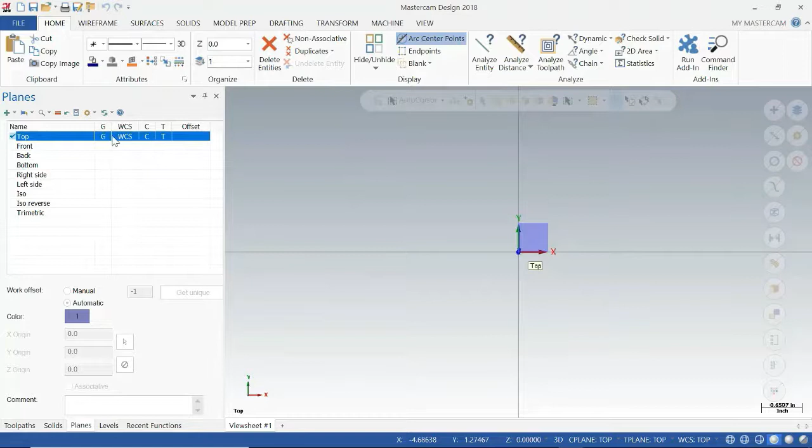And I'll go through some of these. On the left here, this will kind of record everything that you've done basically in here, so this is like your property manager to some extent. Right now we're looking at all the toolpaths that we make. We can also look at the solids we bring in, and we can look at the planes. So here we can see that we have all of our top is for our work coordinate system, our construction, and our tool.

The levels, sometimes if you get a more complicated part with a lot of different entities, like lines as well as solids, then you can make different levels. Sometimes you might have your wireframe on one level and your solid on another, and you can toggle between them without accidentally messing with both.

Then there's the recent functions, over here, I'll talk more about that later. You have these selection options up here, which will allow you to change the way you can select things.

Over here, this will help you select a lot of things at once. So for example, select only solid entities, select all solid entities, and you'll see there's surfaces and wireframe too. So you can see all the different types of entities, and if you need to select certain ones, you can do that here.

Going across the top, we have our home tab, which allows us to change the colors of different things, so you can select them and then change their color. You can look at your different levels. One thing I'll use a bit is analyze distances or analyze an entity, just to see where it's at in space or how big it is.

Next we'll go to the wireframe. The wireframe allows you to put in some simple geometry. Anything more complex than some points in space, rectangles, or a circle, I'd pretty much do in a CAD program, since I don't really like doing that stuff in CAM—it's just not quite as intuitive.

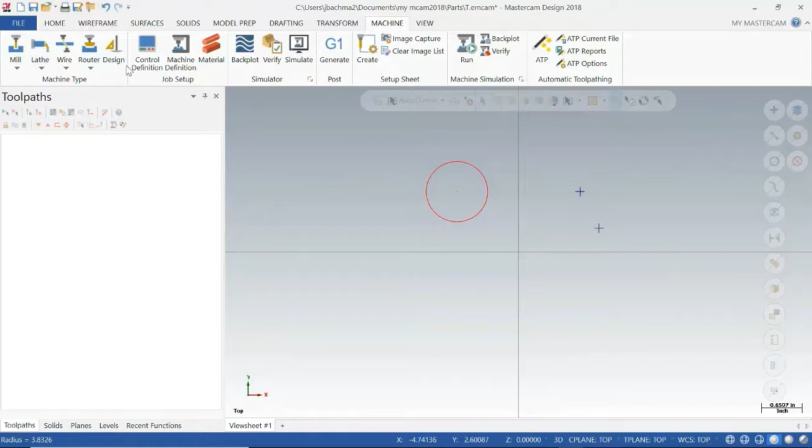And then you can change the way things look. So I already have my axes on—I like to do those. You can also hit F9, if you hover over it you'll see it'll say F9. You can also get rid of certain things, like make solids go away, that sort of thing, if you don't want to see them.

So that's kind of an intro into this interface here. So there's a—first let me delete this, sorry. I'm going to select those and delete those.

Okay, so now let's start talking about the work process for working in Mastercam. First thing we're going to want to do is bring in our solid, the shape that we want to eventually turn our workpiece into to make our part. And then we're going to have to tell it what stock we're going to start with.

You should keep this in mind: you need to think about how you're going to machine or manufacture something the entire time you're designing it. This shouldn't be the first time you're thinking about how you're going to manufacture it, otherwise it's going to be impossible or not very efficient to do. So hopefully you've thought about it before this step, including how you're going to hold down the stock while you're processing it. There's a lot of tricks and things you want to think about before you get to this point, but hopefully after watching this you'll have a better feel for what some of those things are.

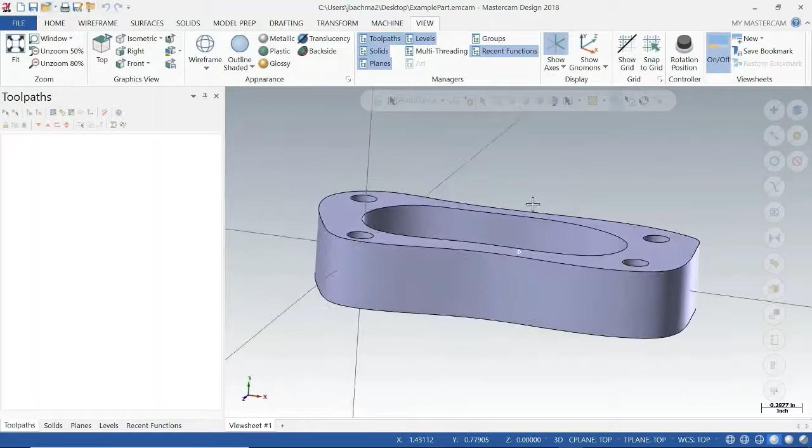You can see it's not really where I want it in space—maybe that's not obvious yet—but it's going to be hard to set my zero point kind of here. You can also see that it's not oriented the way I want. This will be the top portion in SolidWorks; it'll actually usually pull out the front in the Z direction. So if you want your part to come out oriented right to begin with, have the side you want to machine from facing the Z direction.

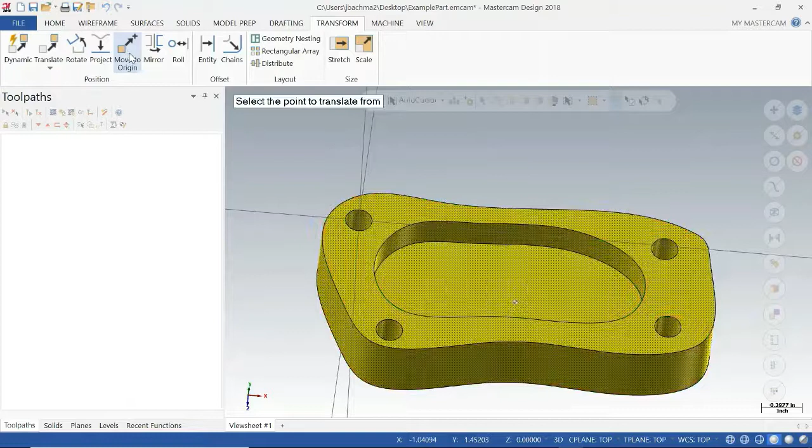You want to be careful a little bit when you say move to origin, because sometimes if you sit for too long, you can accidentally select some of these outer edges and not the actual center point.

Okay, so now I could rotate this down in the Z direction. I actually just usually use the translate to plane. So it says select the entities, so I want this solid, hit end selection up top. I don't want to copy it, I want to move it, right? And I'm going to take this top plane and make that my front plane, so that way it's going to be facing up. Let's give it a little preview. That looks good, right? Still got top, top, top. That looks good.

So now basically I need to translate it in space. There's kind of some different thoughts on this area. If I'm going to have my stock here in positive X and positive Y, I'm probably going to touch off my origin here on the front left. That's nice because the edge finder, or if you're going to use the side of a center drill, it's kind of out front, easy to get to.

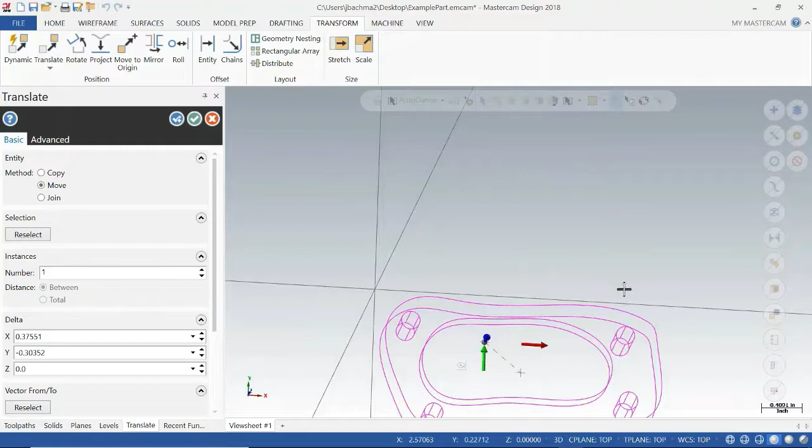You might also want to just go in negative Y and positive X. Let me move it around, maybe that'll make it a little more obvious. So if I move this, we could move our part here, and then we'd have our stock around it, and we could then touch off to the top left. The nice part about that is that you're against the fixed jaw of the vise, so that's not going to move unless you take it off the table. A lot of people on our campus will do this front left though, so it's probably just easier for people to check your work if you do that.

I can see my Z height is already correct. If it's not, you'll want to move it down so it's right even with the top. So I'm going to make it not even with the top like this. And it's not really, so you might not even know how far off it is.

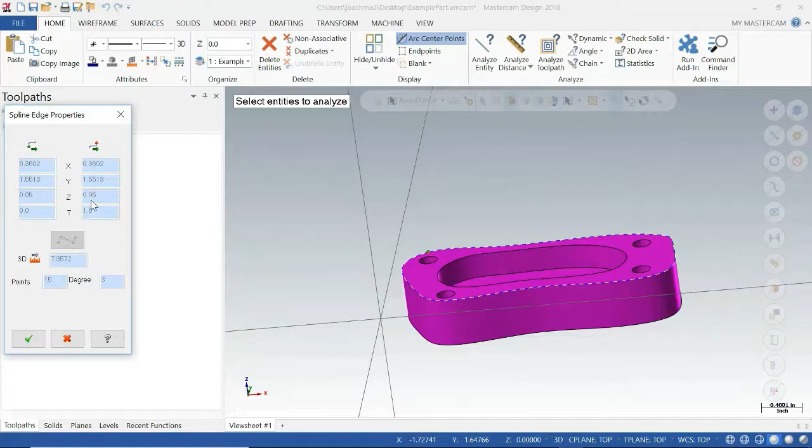So what I might do is go to home and do analyze. I can select a face, or I'll just select this edge. I'm going to see, okay, where is this at? And it tells me this Z is at 0.05 at this point. So okay, I know it's at 0.05, so I've got to move it down.

So I'm going to come down to the transform. I'm going to click on this whole solid. And I'm going to go negative 0.05. And then I'm going to click check, right?

So one thing you might do is look at it from the front. You might right click and then hit front. Then notice that your construction plane and tool plane got messed up. That's actually going to mess up when you try and generate toolpaths. So you'll notice that now, because my construction plane is the front, I'm making circles in that plane rather than the top plane. That's kind of the purpose of that plane.

But again, we're going to want to right click everything on top, right? So the scroll wheel in and out, if I hold shift and grab the scroll wheel, I can move it around. Also left, right, up, down on the keyboard will move it around in space for you. I usually kind of keep it somewhat isometric.

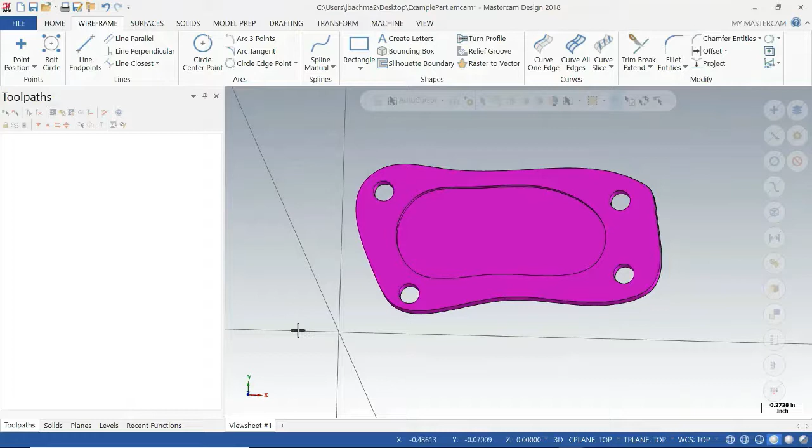Okay, so we have our part in a reasonable spot. And I might think, am I going to put a block of material in here and then cut this out in the vise? I mean, probably, it's probably one way I could do it. I could also use some step blocks and fingers and hold down the piece right on the table with a little piece of material between it, so that I'm not cutting into the table of the mill. So those would both be possible routes to do it.

Keep in mind, you wouldn't want this to get real thin over here after you machine it, especially on the side that's on the vise, because then it's actually going to squish your end mill as it's going around. So let's consider the case where I potentially have some fingers down on the side, but that means I don't want to hit those fingers, so I have to think about giving myself some extra space on my stock so I don't hit it. That also means that piece of material might have to be squared off in the machine. Or you could get a much larger piece and put this anywhere without caring about its orientation too. That's another way to do it.

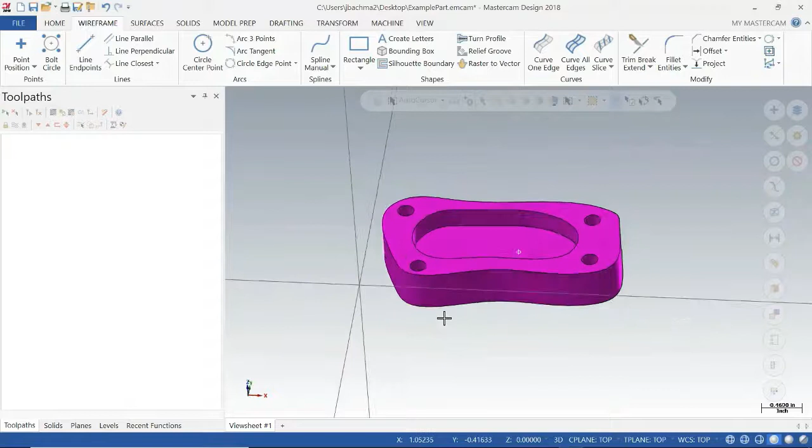So next we're going to decide what type of machine we'll make this out of. We're going to use a mill, and we'll usually use the default. You can bring in your own type of machine definition, but typically I won't. The only thing you might use is the millimeter setting—if you're going to work in millimeters, you can bring that in and do everything in that system. But instead, I'm just going to use the default.

Give it a second, and you'll see it pop up over here on the left. Let me just make sure everything's recording while I'm still doing this. Okay, we're looking good.

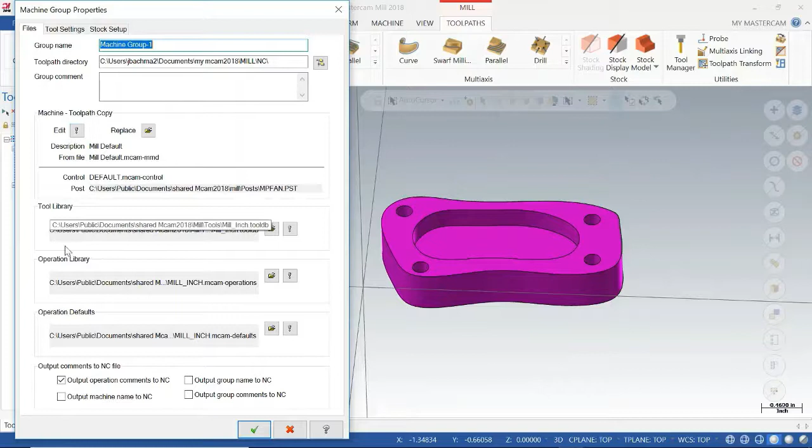Okay, so the first thing I'm going to open up is the properties. I'll start with the files. Oddly enough, the options button is this exclamation point—if you see it, that brings up more options in these different areas. For some reason it looks more like an error message to me; I don't know why, but this might even change in future versions. Here you can have your different libraries and defaults, but I usually don't mess with this.

Here's the first thing I'm going to start to modify: my tool settings. First, I don't want to pull in the spindle speed and feed calculation based just on the tool. It should be based on the material, and then it will use the RPM and the feed per tooth to calculate your feed.

Another thing I'll do is assign tool numbers sequentially, because if you have a big shop with 240 tools, tool number 240 will always be 240. If you have some huge machine, maybe it'd be more like number 15. But for us, we typically have to load in our own tools for each thing we're going to machine, so we're going to assign our own tool numbers and put them in the machine that way.

We're going to start our G-code with N100, and we'll step up by 10. That'll help us search through it if we ever need to find stuff.

Then you can select your material here. So let's pretend we're working out of aluminum—you can edit this and select different materials.

The last step here will be the stock setup. I'm just going to start with a rectangular piece. You can bring in your own solid if you want, and you could even add some of your fixturing to it, but I'm just going to use a rectangle. So what I'll usually do is click this top left point, which basically says that this point in space right now is at 0, 0, 0. Right now I don't have any entities—those would be lines or circles that I drew—but I do have solids.

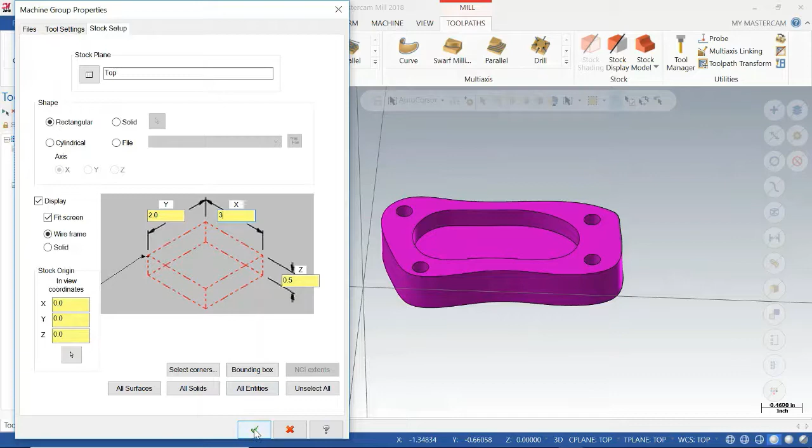You can see now, because I put 0,0 at this top left, I have kind of a bounding box for this. Let's keep in mind though, we wanted some extra meat so we can go around the outside.

So let's go back into the stock setup. I'll click there again. Maybe we want actually 4 by 5, so we'll add a few inches onto each one. I'll click check, and you'll see it's gotten a little bit bigger. That's probably a little excessive, and we can still transform it. So maybe I'll translate this a little bit more. I'm going to select it to move it, and I'll just use my arrows.

So maybe this is the size of stock I'm going to start with. I'm going to clamp it here and here, here and here, and give myself some room to cut this piece out. Maybe you just want the pocket on the inside, and you'd have to position it, but let's say you had a square piece with a pocket - then you'd want to position this to an exact point. For a shape like this, because I want to show you how to cut the outside out, we'll just put it here in space.

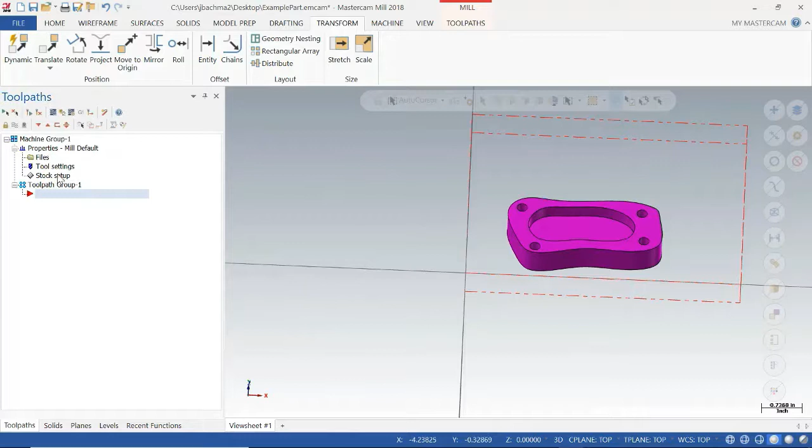So okay, we have our stock set up. I like the top of my stock and the top of my part all to be at 0 in Z, so I can tell when crossing from positive to negative in Z, I'm going to start to cut, and that's when I'm really keeping a close eye on things.

All right, so at this point, once we selected the mill, we have these additional tool paths that come up, and they're split into 2D, 3D, and multi-axis. I'll typically work with 2D and 3D. I'm sure more advanced machinists will use this all the time too, but I don't machine as often as I would like to, so I'm generally in these two areas.

You can see the different types. So contour - you'll select a contour and you can go on the inside or outside. You can also add extra paths, so if you want to create something that's kind of like a boss, you can do that. You can program in drilling in different spots. But let's start with the pocket on ours, right?

So we're going to start with the pocket. This is one area where it looks a little bit different in 2020 - they've just updated these symbols, but they're the same group of symbols. Because we have a solid and don't have any kind of wireframe entities, it won't even be an option here. So we'll click the solids and we'll be able to select things in 3D.

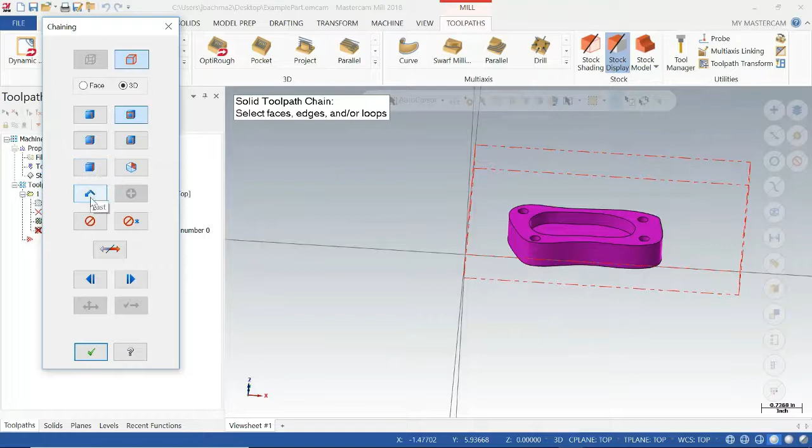So you can select just one edge here, and it'll do a full loop. Here you'll have to tell it which way to go along these different edges. Here it lets you just do a partial loop. You can select faces, the last thing, and this will unselect things or select things.

So when I'm coming and selecting, I'm going to select this pocket. Where I click is usually where it's going to start the cutting, so I'm going to select a part that's not super sharp, or maybe it can't get in. Here I think I'll be able to get a tool to get in, and I can select the top or the bottom as well - the bottom is nice because then it knows what depth I want to go. So usually I'll select down in here. It'll ask me, yep, that's the right face.

And I want my tool - so here my tool is going to be turning clockwise, so it's going to be conventional milling. I want to switch the directions, and I'm going to want to do climb milling, so it'll go along the left-hand side. I'll click check, so now it knows my contour. If I ever come back in here and want to reselect your geometry, you can click on select chain - you can remove and then reselect.

So next we're going to select our tool. I'm going to come in here to select tool library. You'll see various options, so let's come in - usually what I would do is select none to start.

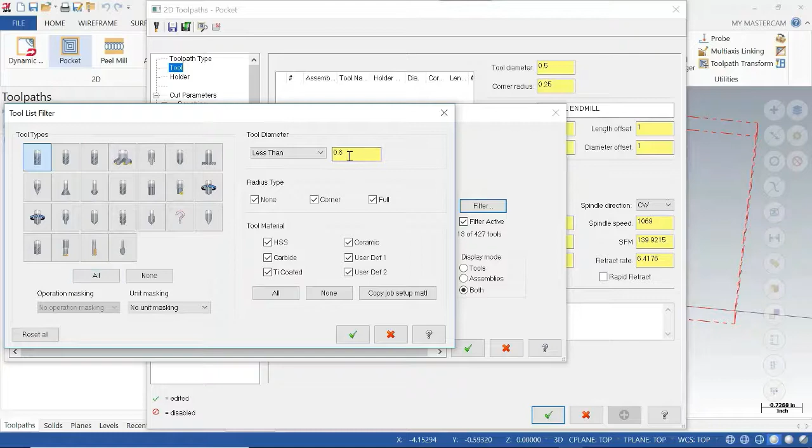I'll do my kind of flat end mill, and then usually I'll use a filter just to get rid of a lot of the sizes. And you can see I have these options. So let's try a 1/2 inch.

So this is tool number 290 in their system. You'll see when I bring it in, it'll come in as tool number 1 for me. And when I call out for a tool offset or diameter offset, this will all be tool 1.

So the material brings in 400 surface feet per minute. That calculates the spindle speed. You can use that to calculate these. So usually I'll just use rapid retract.

In this case, this is a little bit high, so I'll bump this down to on the order of 10. And my plunge rate's a little bit high. I'll usually do this on the order of 1 to 2.

And then you have your force tool change. This is nice in that if you do 2 operations with the same tool, when you do the second operation, it'll still program in the tool change, which is nice because it's easy to jump to that spot. So this makes it easier to go in.

So we're going to keep going. So we have our cut parameters. In this case, we want to do climb.

It kind of depends on how you want to do the tip compensation. So we want to compensate, and then we're going to select nothing on the wall. So you'll see those lines will go away.

Next, we'll go into roughing. Right now its automatic method is this high speed. I would either use that, or constant overlap spiral, which is also a common one to use.

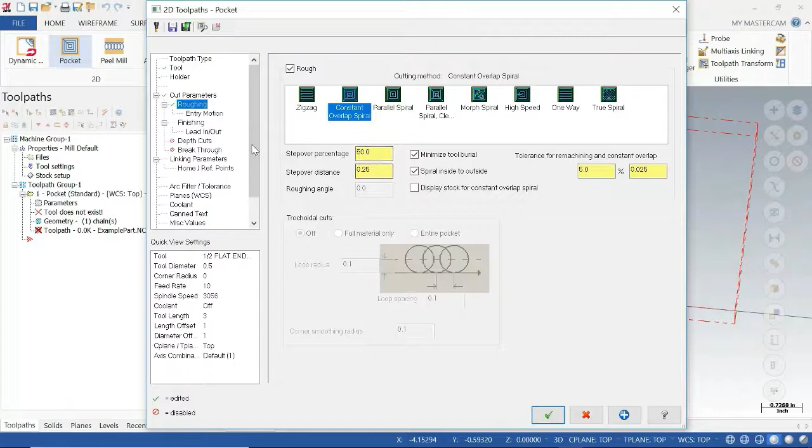Basically what you'll do is step over 50%, which is a 1/4 inch each time. You have this entry motion, which is usually in percentages of your tool diameter. So here, instead of having to go straight down, it'll helix down in.

So next we'll have finishing. If we want to do a finish pass on the sides of it, maybe a 10 thousandths finish pass. A spring pass will basically be right at the surface finish, going over one more time.

It kind of hopes that there's a little deflection on a bigger cut, and that your last pass there won't be any deflection, so it'll cut a little bit. I'll usually keep the tool down so that it's not going up and out all the time. If you want to try and clean out the chip more, you might pull it out.

And I'm only going to do it at the final depth, so I'm not going to do a finish pass halfway up and then at the bottom. I'm just going to do one finish pass out here.

So lead-ins and lead-outs. You have this entry, which will come in tangent, and then you'll have this length. So this will come in a 1/2 inch this way, and then it'll come in at 100% of the tool and sweep 90 degrees to turn into here.

So if you wanted to decrease this to 45, you could come in more at an angle like this and not do the full 90. But typically, you could do something here, bring it over to here. But the typical setup's usually good here.

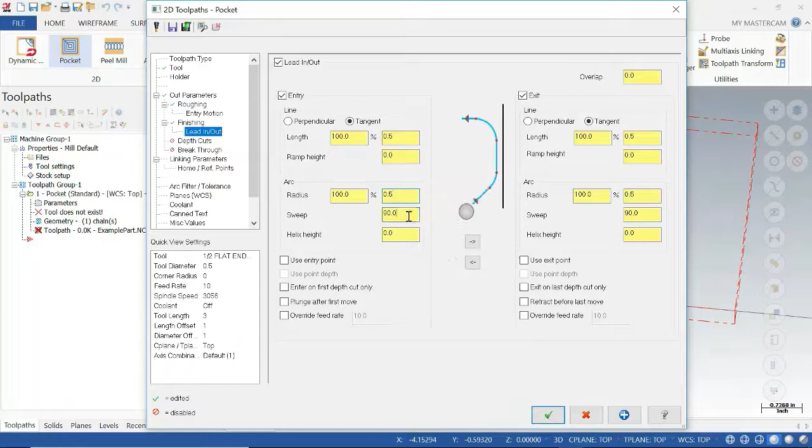So next we'll do depth cuts. Maybe we don't want to do the full 1/4 inch depth all in one go. So maybe I want to do it in 100 thousandths increments and do one finish pass on the bottom of about 10 thou as well. And here again, I'll keep the tool down.

So breakthrough, if I want to go all the way through, I do breakthrough. Next, and maybe one of the most important things to pay a lot of attention to, is your linking parameter. This one, you're basically going to tell it where's the bottom.

So here, I can tell it incremental, which basically says that contour line that I picked, I want it to be 0 relative to that increment. I could also do absolute negative 0.25. So here, I'm going to want to do 0 for the top of my stock, absolute, because that's where I put it.

So here, this would cause a crash basically if I didn't change this. Right now I'm saying that the feed plane right here is only 0.2 from the bottom of the pocket.

So that would put it like right here. So that means it would be rapiding down all the way to here and then feeding. So I like to make sure I have absolute for all three of these. And then this one kind of depends if I pick something at the top or the bottom of the pocket, then I might do absolute or incremental here.

The last thing you're going to select is the coolant. So we have flood coolant, and we're going to turn that on. And so here you can begin to see highlights of the things that you picked, like the feed rates, the spindle speed, coolant, and that sort of thing.

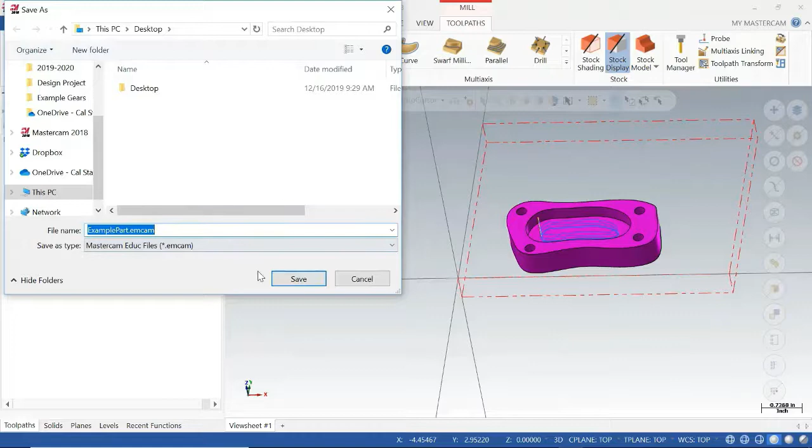Before you click that, I'd like to save, and that's a good reminder that it's always good to save. So I'm going to save this. This is my example part. I'm going to save it on the desktop.

You can change this in simulator options, and then you can post the G code. Here you can lock certain operations if you don't want them to be messed with. Here I can turn the cutting toolpaths on and off, and this insert arrow shows where I add more operations below, and I can move that arrow around.

So those are the common ones that I use in this panel. If you want to check the rest out, just highlight over the top of them. So let's try and verify it.

All right, so you can see our stock, you can see our tool, you can see the tool position, right? So let's make this full size. So you can see I'm a quarter up. I'm at my retract plane.

And so before I run this, you can look at, we don't have a very long thing to simulate. The whole thing only takes 2 minutes in real time, so I'm going to have it go rather slow. You can modify how slow or fast it goes, and depending on your computer, you can change the performance. For my work computer right now, it's not very good.

Okay, a couple other things we're going to do is make some stop conditions. We want it to tell us if it's going to crash. So I'm going to open up stop conditions. Whenever we change operations, I want it to stop. If I do a tool change, I want it to stop. If there's a collision, I want it to stop. You might have some tool inspection points — I don't have any, but you could select that.

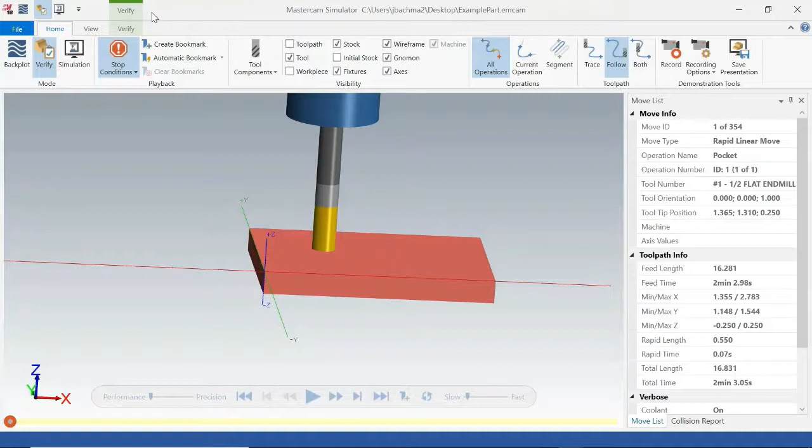So the other thing I'd like to do at this point — I've got to remember where this is now — options. So options at this point, you can come in here and say collision checking, right? So basically now I want to select what things I want checked. If the tool collides with any of these, any of these, or any of these — so any types of collisions — I want it to tell me about. Okay.

I just updated my defaults.

Other thing I'll do is come into the collision checking here. This is probably what I meant to select - I want it so that if it hits the shank or if it hits the shoulder, I want it to tell me about it.

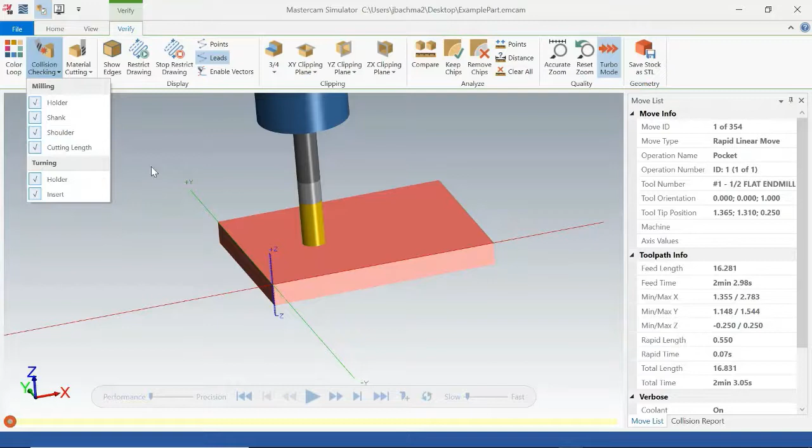Okay, so learn something new every time. If you select this option, this would be your tool just hitting your workpiece and not your stock, so you actually don't want these selected. What you actually want is this verified one, where no matter where it hits on your stock material, it's going to find those collisions.

The other thing I like to do is the color loop. What that'll do is, if you do multiple operations, you'll see how it comes in handy - you'll be able to see the different operations.

So at this point now, we're going to come and hit play. You can kind of see our stepping down. So there's our pocket, and it's smoother than that - it's just that my performance is so low that it's doing it in that way.

And you can tell my tool is not that big, so there's not much room for doing a helix down into it. So if, for example, we wanted to switch out for maybe a 1/4 inch, let's see what that one looks like.

So we come to a 1/4 inch, and then we're going to check. Now I see it's dirty, so I'm going to regenerate it. Let's go back and re-verify it. So when we come in now, hit play - it'll load fast.

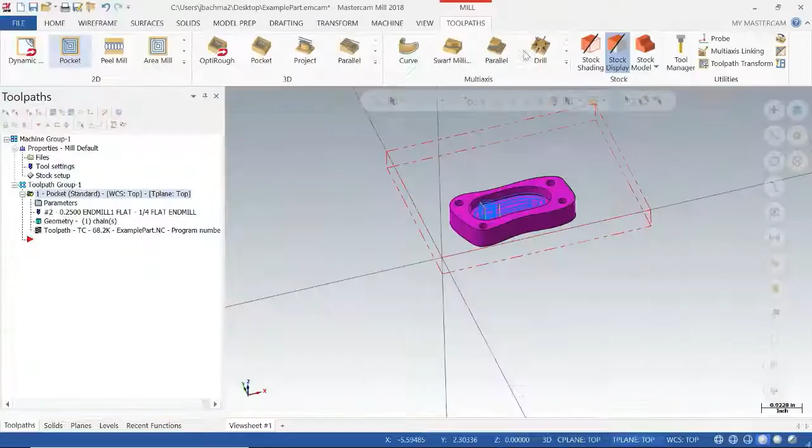I guess you can't really see the helix as much there, but you can see the helix now in terms of it helixing down each time. So now it actually has a helix, and it has a little bit of a lead-in. So maybe that's closer to what we want right there.

So next, maybe what we're going to do is come in and drill these holes. So we put our insert here, I'm going to click down, and then select the drill. So we'll select drill - we want to drill points.

So see how I can actually select this bottom point, which would drill in the center, which I don't want. So I'll just come up kind of in the top right and click, and now it's going to give me center.

And so that means let's drill this one first. As I come over here and click, it'll drill this one, then it's going to come over here and drill this one, then over here and drill this one - making sure it's got the centers of each one.

So that looks good. Click check. And it's going to do it in those three orders, as you see.

So for the tool here, select tool library, my filter. Let's add a drill bit - let's see which one this is. Actually, a drill bit, spot drill right here. So we've got spot drill and center drill.

So we're going to want tool diameter less than maybe 0.3, because I'm going to want... let's open this up. So I'm going to want - usually this number 3 center drill is the one that I'm usually going to use.

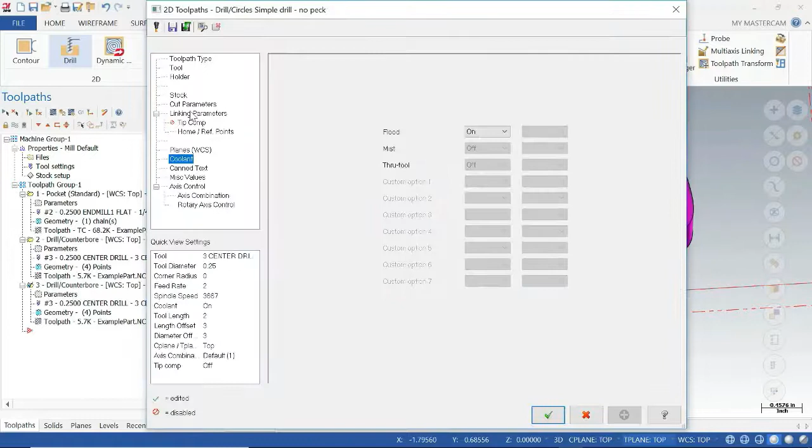So if I want, I can right click on this and do copy, then come in here and paste it in again. And then I'm just going to do almost the same thing, but this time, right, maybe I want my...

I think I have roughly a 3/16 hole in here. So I'm going to do select tool library, filter - I'm going to want my spot drills.

Hopefully I have small enough spot drills in here to do this. Oh, it's only got kind of small spot drills. So let's...

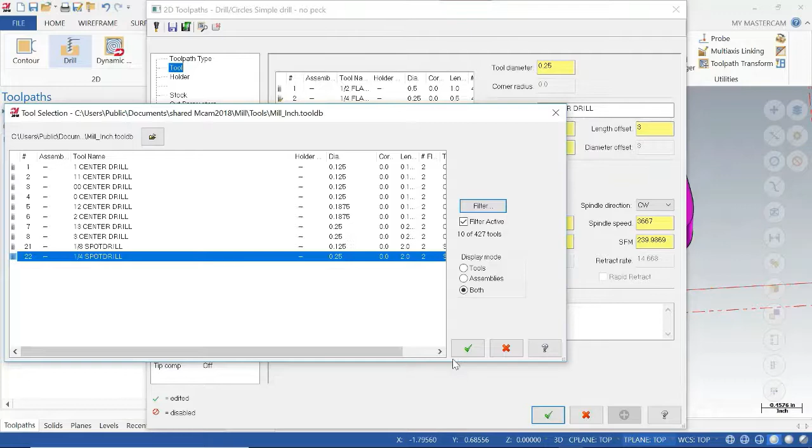So if we want to, we'll come in, we'll put in an eighth, or a quarter, and then we're gonna modify it. So we'll hit this spot here. So we're gonna say, actually...

So you can see, let's come in here and select the 3. No, let's not. Let's do 3/16. We'll do, yes.

And then we're gonna have to change the drill diameters here. The overall length maybe is 3 inches. Cutting length is 1.5. So we'll bring in, this is typically going to be around 118, if I recall right.

So maybe click on these, you can see the different things it's telling you about here, and then we're going to click finish.

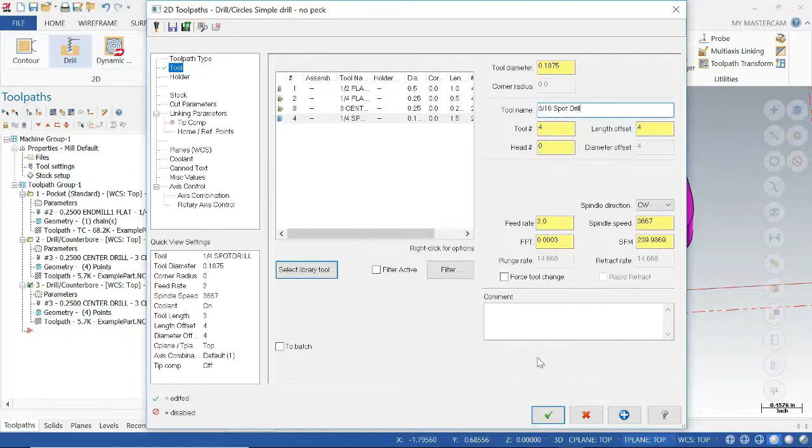So we're going to change the name of this tool. So this will be 3/16 spot drill. Brought in the same parameters from before, which is close enough for what I want to use.

I'm going to click check. Then we're going to have to regenerate to fix this one. Okay, so what we're going to do next is verify the selected operations.

So what you can see now is what I didn't want to do, it's just going to do the drilling. So if I close this, this shows which ones are selected, right? So before I verify, I might want to select all operations, and then hit verify.

One thing you can do if you want to move these around - for example if I drag this up and put it here, it brings this above it. If I bring it back here, it puts it there, right? So that's what I want. If I want this to be under number 1, I drag it to 1, and it goes under. So now I have everything selected.

Let's verify. So I have my 1/4 inch end mill, and then let's hit play.

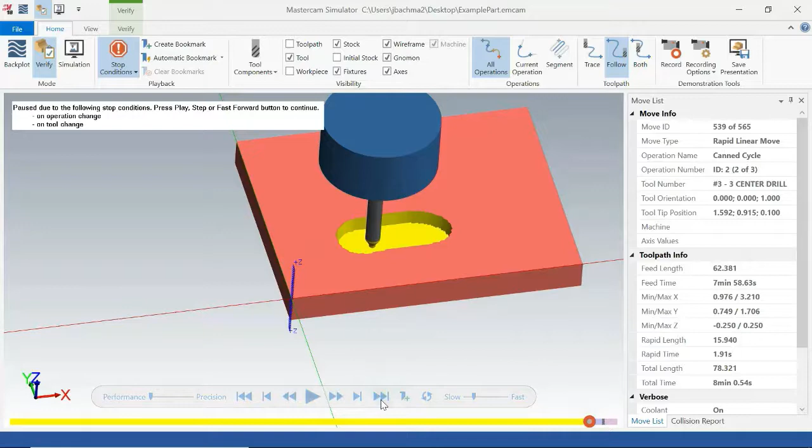Right, so now there's an operation change and a tool change, and it's going to come in, and we're going to see what we're going to do with the center drill - you'll see this is going to be blue, and this one's going to be purple. So we'll see the difference. So it basically did those 3 holes, and then it's going to drill for those ones right there.

So one thing we want to do is change our linking parameters, because we'll probably want to drill all the way through - at least not too far.

So that's one thing I can tell we can change here. Let's close this, so we have our parameters. I noticed that I didn't change this all the way down, so I'm going to go absolute. This whole thing is half an inch, so I'll do -0.5.

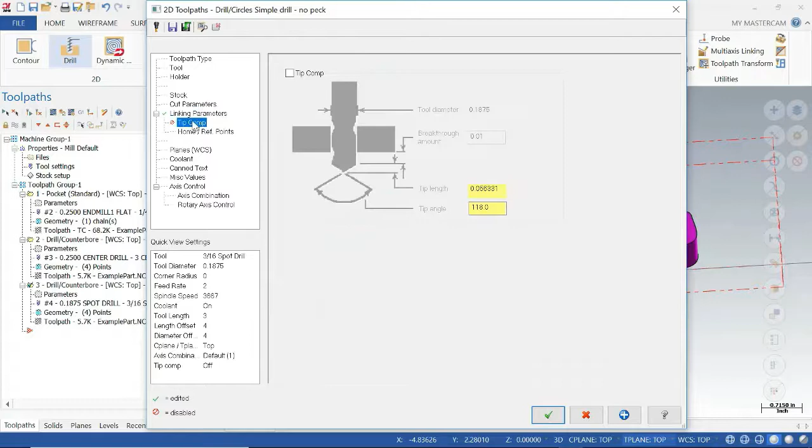You could compensate for the tip, right? So here's this 118 degrees, and the breakthrough amount, so about 10 thousandths. So that looks good to me.

So I'm going to regenerate that operation. I'm going to select all, and then hit verify again. And I'm going to bring up the performance just a little bit, because that before was getting a little crazy.

All right, so we got a tool change, it comes in, does those three spots, and then we'll come in with the 3/16 all the way through. So that looks reasonable - no collisions. I can look down in the bottom, right? I can look from this angle and see how far down below the part I'm going.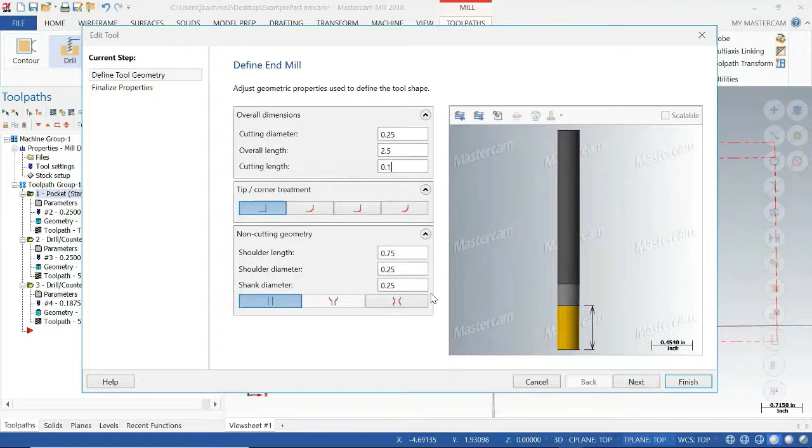So that's that 0.1. So let's look at a couple examples if we did something wrong. So one example for doing something wrong might be - let's say this hole was actually much deeper than the end mill could cut. So instead of having this 0.5 inch cutting length, let's say it was surprisingly short, 0.1. Keep in mind, typically you're not going to have a thing that's 0.1, but you might want to do this where it's 2 or 3 inches deep, which will cause issues because you don't have a cutting length that's that deep.

So we come in here and we now do verify, because I added the shoulder - the section of the mill tool between the shank and the cutting length - it's checking for collisions basically. Now when I do this, you'll see that it's going to give me a collision warning. So it'll do first.

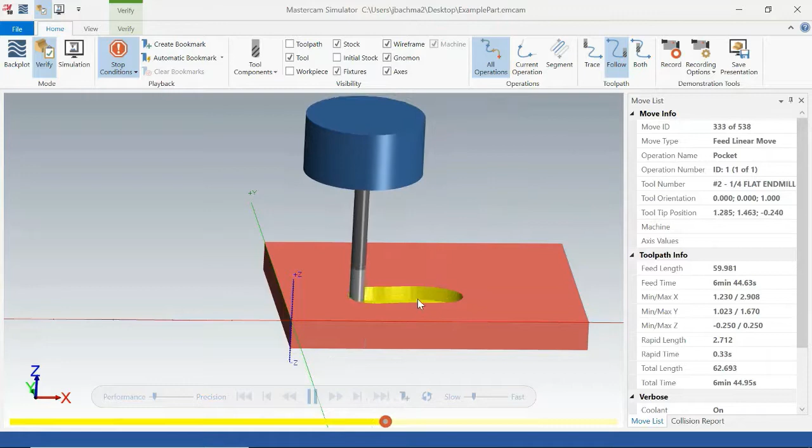So it took a little bit, but you can see that it begins to notice all of these collisions inside of here. That's the one nice part about having the collision detection on. So let's go back here.

Let's put this back to typically a quarter inch. We'll probably have about a 1 inch cutting length, so that's more reasonable. Generate that.

Let's say we also did something wrong. Let's say we're on our linking parameters here for this, and I forgot to... or maybe let's do one that's even easier to accidentally do. Yeah, just based on our geometry, it might not be as much of an issue.

So let's go to this one actually. Say on our linking parameters, we could do 2 things wrong. We could put the top of our stock as -0.2 essentially, and then that means it's basically going to at high speed run into our part here. So let's regenerate that operation.

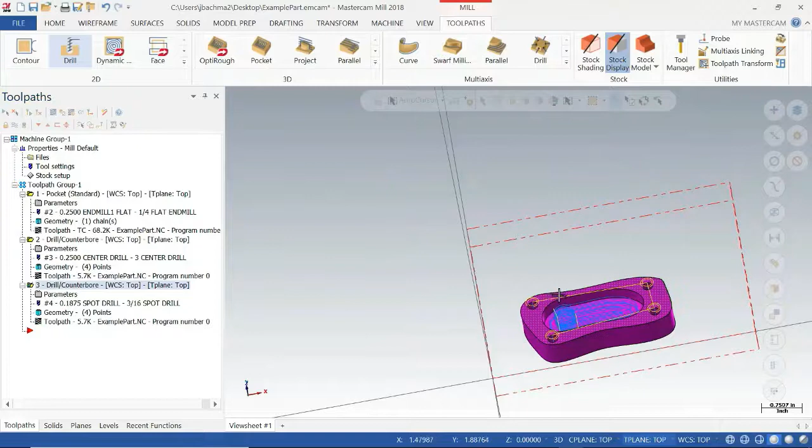So let's try running it now, see what it does. So it looks like there it did not detect quite right that we had a rapid going down into our tool here, into our part here.

So that's one thing you're going to have to really be careful of, right? It's setting these portions right, because it didn't realize that even though it was doing this yellow rapid in here, that it was going to crash. So let's see if we can do this more.

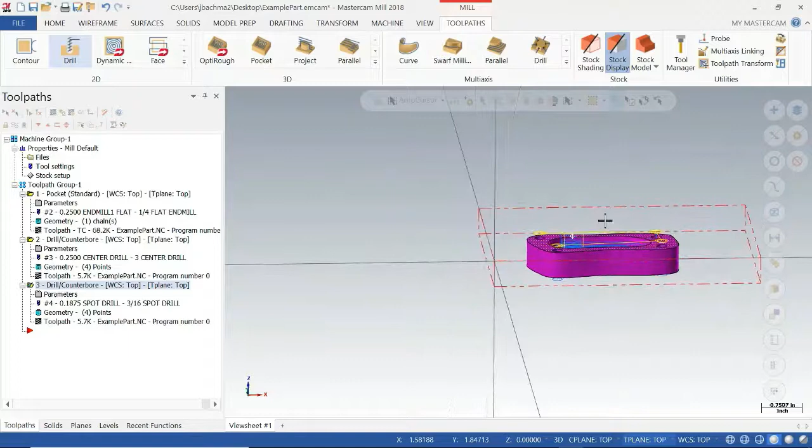Let's try to make this more pronounced. So it looks like it'll bring in the yellow where this edge of the bit's going to be before it's kind of rapiding over. I wonder too if it's just also getting smart enough that it's realizing what I did here is wrong.

But so we're going to put in 0 here. So let's look for another error. Let's say we didn't actually retract up enough. Let's say this was negative 0.4, and let's say this was negative 0.1.

So now it realized that the side of the tool, instead of the tip, was running through the material, and so we had a collision, right? So it picked up that mistake. That's another one you want to be careful of.

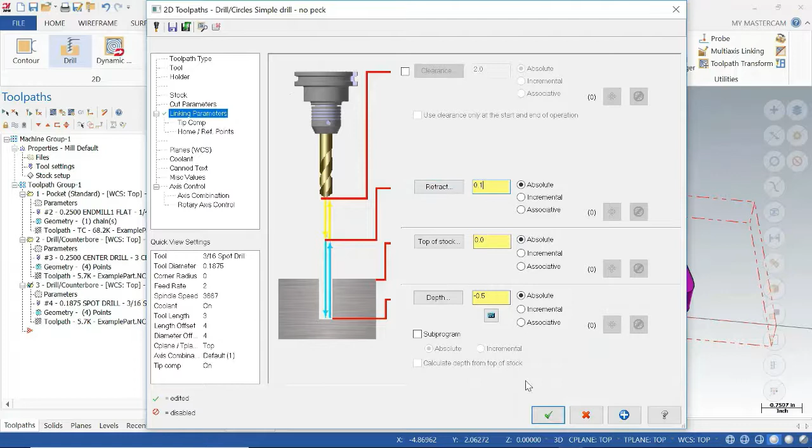One thing you might want to do is, a lot of the time you're going to want a peck drill, especially if you're going to put any sort of length in. So in this case, when I peck, typically you'll probably want to peck roughly the diameter of the drill bit. So maybe I'll do 0.1, something like that.

And so now it'll go down and then up again, down and then up again. So the pecking is kind of the typical process to do for any drilling of a depth that's more than maybe half the diameter of the drill bit, something like that.

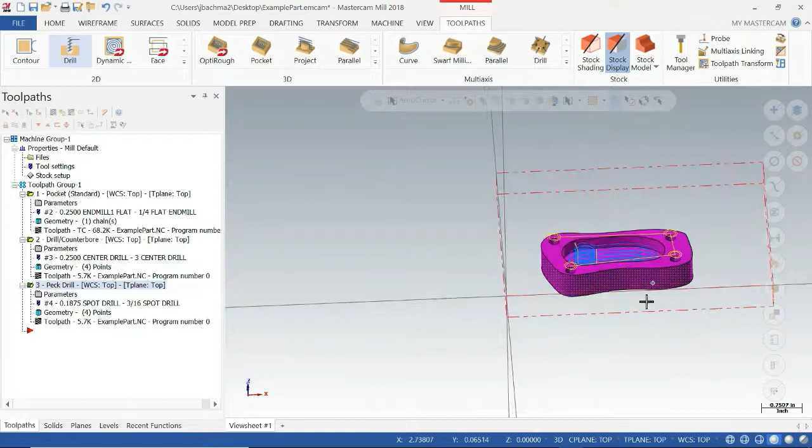What I'm going to do is say I want to, in wireframe, turn this outside edge into a wireframe entity. So I'm going to select curve all edges, select this face, right? And then I'm going to click check, end selection, and check. So now I have a line here. I also have lines on my circles too.

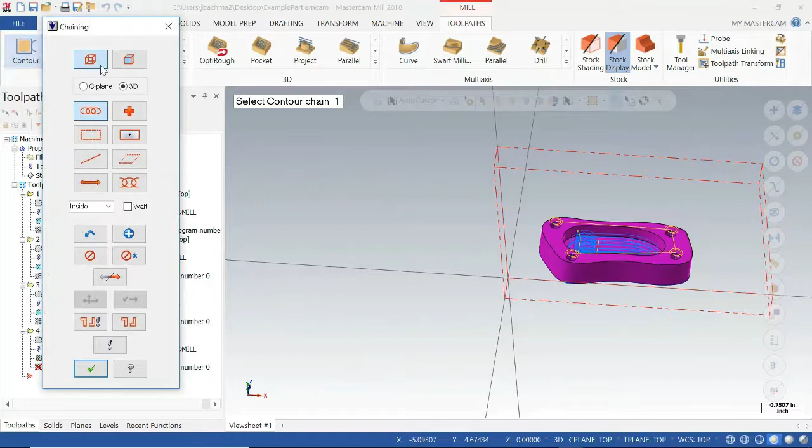So what I can do now is when I come to my toolpath, this time I just want to come in and mill around the outside. I'm going to do my contour. This I want to do the wireframe here, so I want to select this edge. Maybe I want to come in from this side, my contour, and I'm going like this. So this is climb milling, which is good. Here I'll have options—I don't know why this exclamation point is options again, as I said before.

So in this case, we'll use our 1/4 inch end mill because we need to go a little bit deep. I'm going to force the tool change and do a rapid retract. I'm going to get my feed rate down to something close to 10 for this, and 1 on the plunge, something around a thou per feed per tooth should be fine. We're not in a big rush, just making one of these.

So then we're going to go to the cut parameters, make sure there's nothing on the walls, and then what we're going to do is might get rid of any lead in or lead out because we just want to cut it away.

We're going to come to the linking parameters. We're going to say we're going to want to go all the way down to the bottom. 0 is the top, and I can leave these two as absolute. Otherwise, we'd have some crashes.

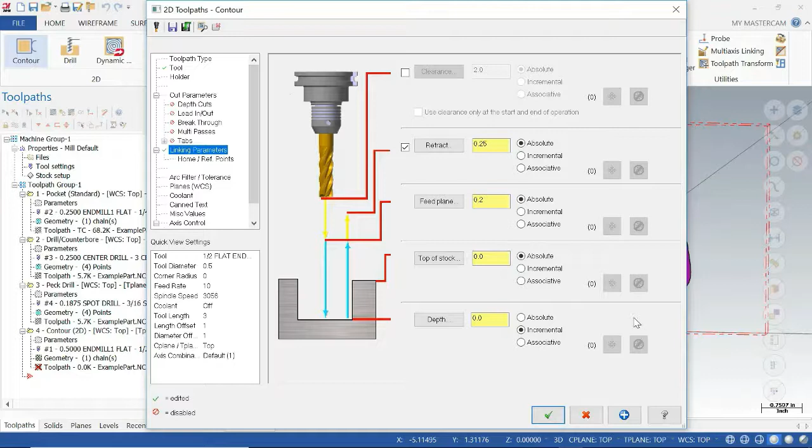Next, we would like to leave some tabs though, because as we cut this out, we can't let it fall. So then it's going to break our tool. So what we're going to do instead is we're going to add a few tabs.

I usually like to pick the tabs myself. So this is a side view of the tab. It's going to come in and do an angle. I don't need an angle, so I'll just have it go straight vertical. I just need a partial tab. That's fine with me. So I'm going to manual, and I'm going to select the midpoint.

I'm going to come in here and do position. I'll maybe do one tab per side. So I'll click - so this tab is way too big. Let's go back out. So 1 inch is way too big. Let's do 0.5. Not negative 0.5. No, 0.5.

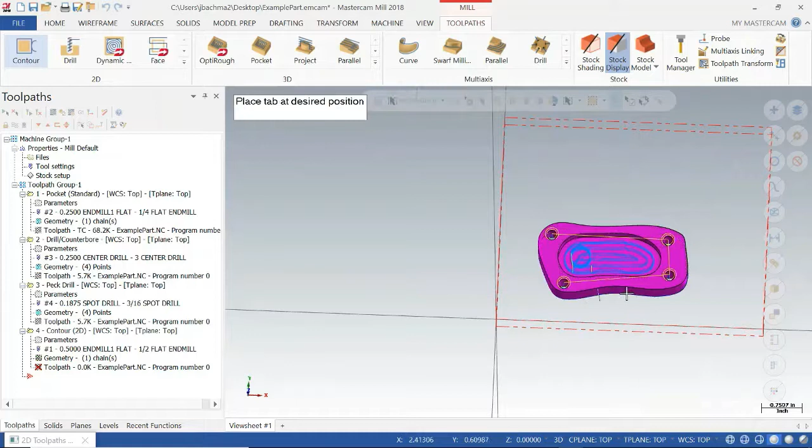And then we'll do the position, so now I'll select it. Even that's probably on the big side, but maybe we'll just do 2 tabs. So I'll do 1 tab there, and then I'll select this chain again, and I'll do 1 tab on this side. And I'll press enter when I'm done.

Find my 2 tabs. And this one I'll maybe also do a breakthrough - maybe 20 thousandths breakthrough just to make sure I actually get the whole thing. So I click check, it looks good. It's only done it in 1 pass right now, so that's maybe the only downside.

So I'm going to click again - I should have gone to my depth cuts. I don't need a finish cut, but let's go down 0.1 per time. So we have to regenerate the dirty path, and now you'll see I'll have multiple passes, and I'll just do the 1 link at the bottom.

So one thing - now that I have my 4 tools, you'll see I'm going to want to put in my tools usually in the order that I'm going to use them. It's easier for me to remember it that way. So what I'll do at this point is right click on here and do edit selected operations, and do renumber the tools. I'm going to start with 1, and increment by 1. I don't want to add any numbers to these offsets.

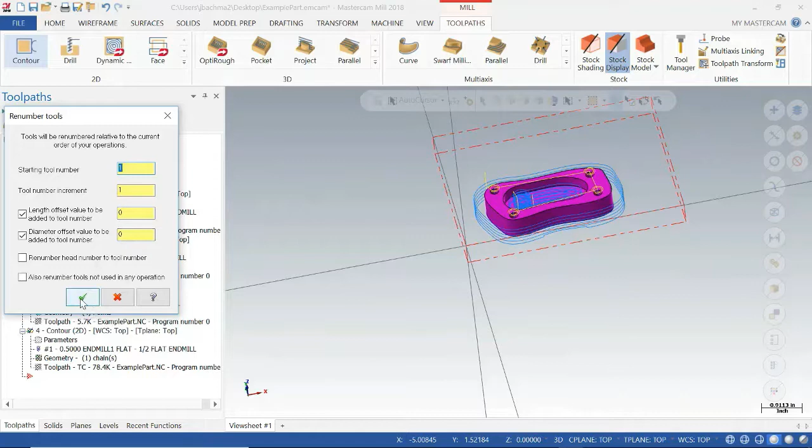Oh, that was weird - that's because I didn't select them all. So that'll also happen when you're trying to delete things. Reminding of accidentally deleting things, let's save it at this point. So I have them all selected, right click, edit selected operations, renumber tools.

All right, 1, 2, 3, 4. Looks great to me. Let's verify the selected operations. So we'll see the different colors - you can see kind of the respective length of time. Total time it'll take to machine this is 20 minutes. It's going to come in there and mill out, hog out this section.

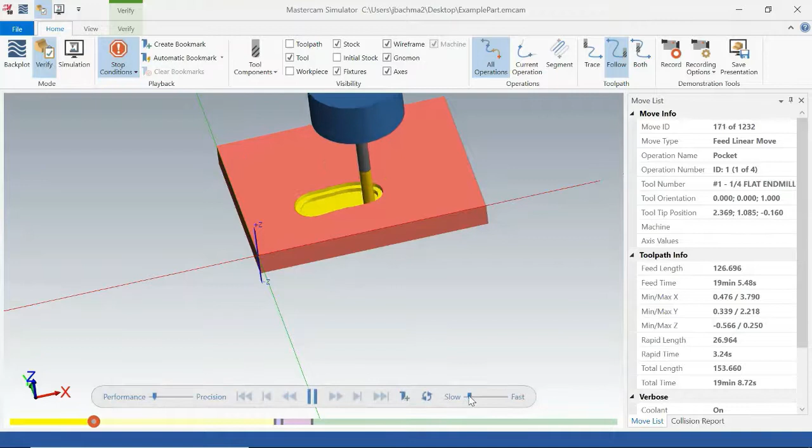It's switching its tool. Looks like it's above, that looks good. Come in, it's going to poke those 4. Another tool change, come through and peck all of those.

Now we're going to come through and use our half inch end mill. Our half inch end mill will come around the outside and figure these out. You can see the different colors from each of the tools we're using to cut.

Alright, and you can see the 2 tabs that we left so that this piece does not fall in. You just got to check now, if you have some fixturing holding this here and here, you want to make sure that you're not running into it at this point.

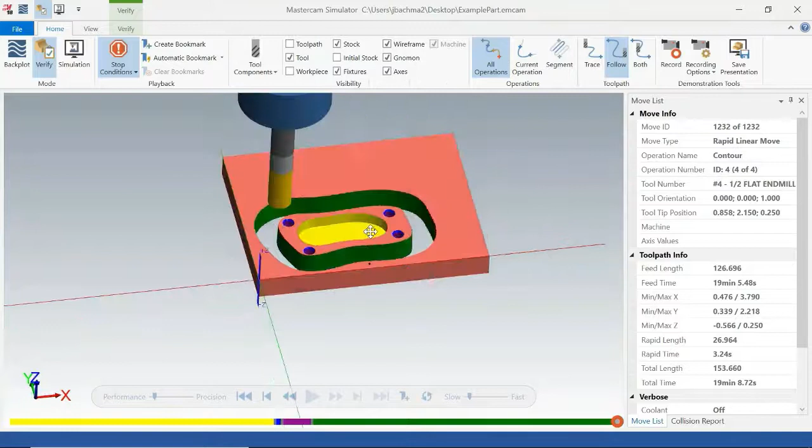You might try and have this in the vise. It's not much material over here, so I'd want to move this and have a nice chunk of material on each side inside the vise, so we're not just pressing on these little tabs, because right now if we were pressing on it hard, we could just kind of pop this part out with the vise.

So far that looks pretty good for making this part, and we've kind of gone over some of the standard pockets, drilling, and the contour. Some other stuff you might use is facing things off. The other thing you might use with contour, I suppose, is the

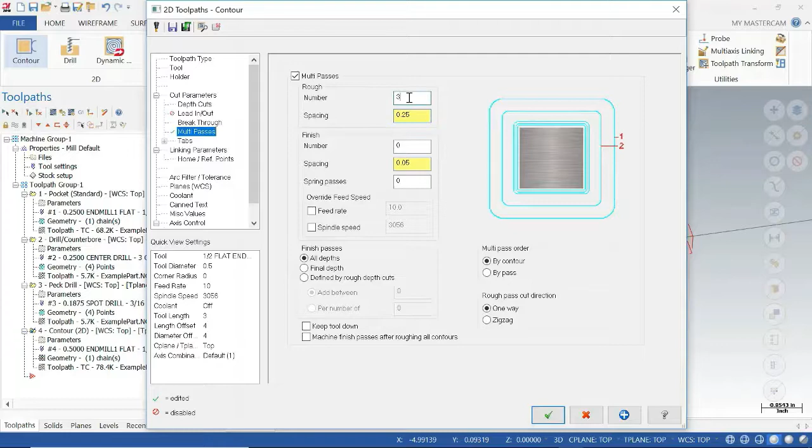multi-passes. Sometimes I'll use this. So let's say I actually want to make more of like a boss, or I wanted to make it bigger. I could do maybe 3 of these passes, and maybe do them at 50% of the tool diameter.

And then if I regenerate this, you'll see now it'll kind of step out. Of course here I'd start to hit my vise and stuff, right? So that would not be desirable. But there are cases where maybe I want to make a boss or something, and I'll do this.

Let's do the backplot on this operation. So one thing we'll test is doing the backplot. This one will control the speed of it. You can kind of quickly go down and click the info and get the time.

So this is now 28 minutes. And we can kind of quickly see where the rapids are, so it's kind of starting at the outside, going to the inside, it looks like. Cutting this. Alright, so I can close the back plot. That's just kind of a quick way to check on things, how things are going.

So we'll remember to save it at this point.

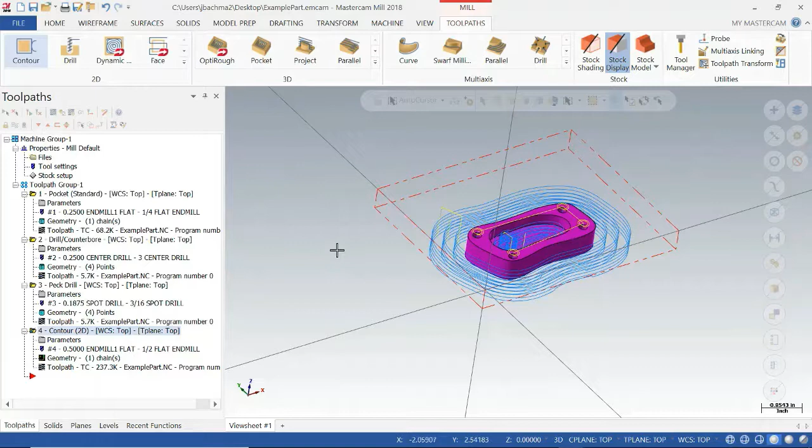So now that I've talked a little bit about some of these 2D operations, I'm going to just do a brief thing on some of the 3D parts. So what I'll do is I'm going to file open, and I'm going to use my example 2 part. So let's open that part here.

So what I've basically made here is, let's say I have a part and I have some sort of roughly random protuberance and some kind of random pocket that I want to be able to machine out. So the same things apply, right?

I'm going to have to turn this so that it's up in the z-axis. So I'm going to go back to my transform. I'm going to translate to plane. I'm going to select this solid, right?

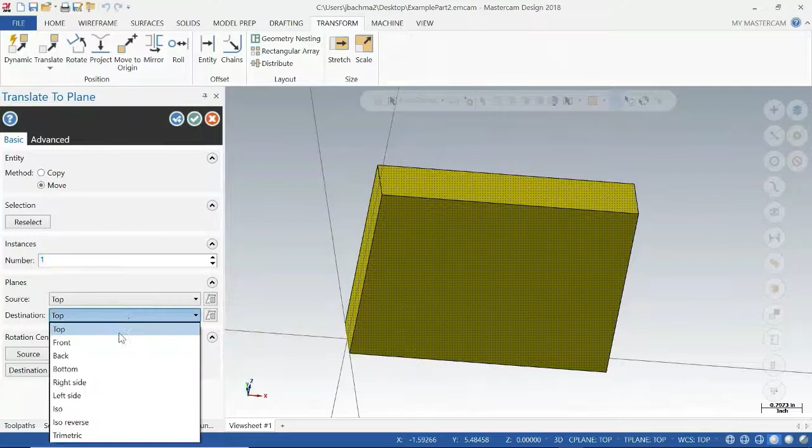And then I'm going to come down to the front, right? And so when I click and I want to move it and not copy it, now I can have this point here. So what I might do next is, one way to quickly move this all the way down over here is I could click this point, move that to the origin.

And then the last thing I'll do is I'll just translate this entity down. So what you can basically do is we'll end the selection, and then I'm just going to move this down and check, so that the whole thing is below the z-axis. Let's check here.

I don't even know if this analyze entity will really work. Yeah, it's just too complicated of a shape. We can right click and then do front view, and we can see that we're under our stock, but when we're done, we'll go right click and go back to top, so that we keep our planes in the right place.

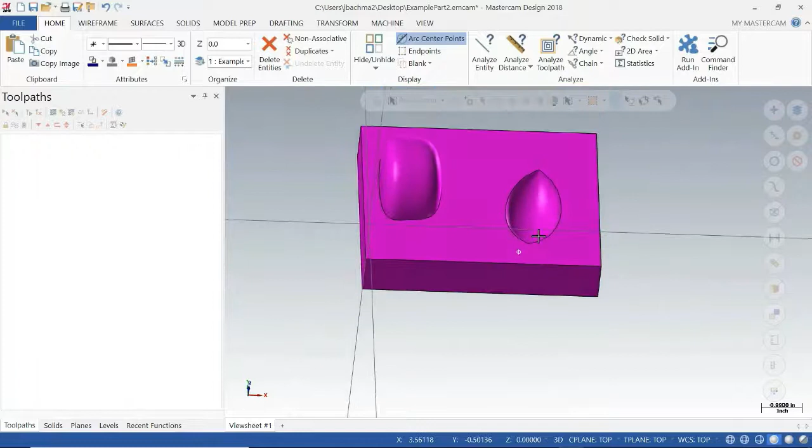Alright, so we're going to go back to machine again. I'm going to go back to the mill default. So what that's going to do is that's just going to bring in the default machine. And the same thing we did before, right?

We're going to go into our tool settings. We're going to calculate the feed from the material, assign tool numbers sequentially, put in our material, start with 100, increments of 10. So we've seen that all before.

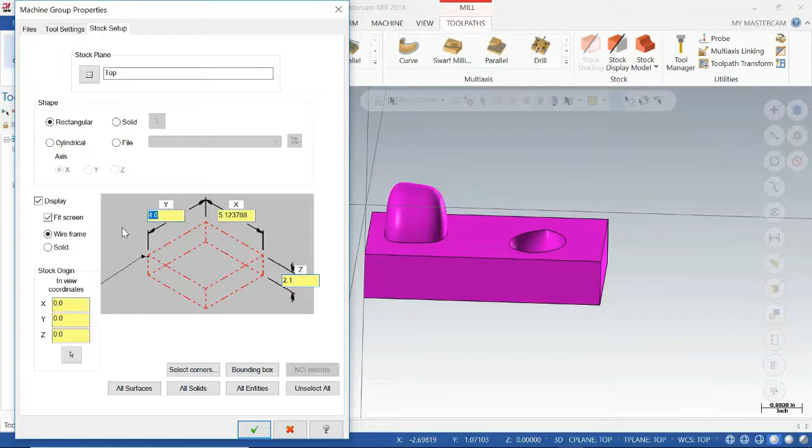Next thing we're going to do is set up the top stock. We're going to bring in all the solids that we have at this point. I'm typically going to take this point, let's say this is 0, 0, 0. This might have to be a little bit deeper, so 2.1. No, these should be the right sizes. So now we have our stock set up. We'll start with a little bit bigger stock, then we'll machine this out.

Let's say maybe we're just going to be holding this on the side in the vise. That's the way this is going to be in. So we could actually do this like this without having extra overhang material to clamp it down. I'm going to save frequently. So this is my example part 2.

When doing some 3D machining, instead of the 2D toolpaths that we were using before, we can start to look at some of the 3D toolpaths. When you open up the 3D toolpaths, you'll see there are two groups: the roughing group and the finishing group. The difference between the two is the roughing will actually look at where the top of your stock is, and it will calculate each step down in Z to remove that material. The finishing will just come down near the surface that you select, and then it will do one or two passes depending on what you program.

Now that we're doing 3D type cuts, we can start to look at some of the different styles that they have. What you'll notice is most of them will keep one axis constant, or at least one direction constant, and then move in the other directions. For example, you can see the pocket and the OptiRough generally work down as constant Z, so they'll kind of step down.

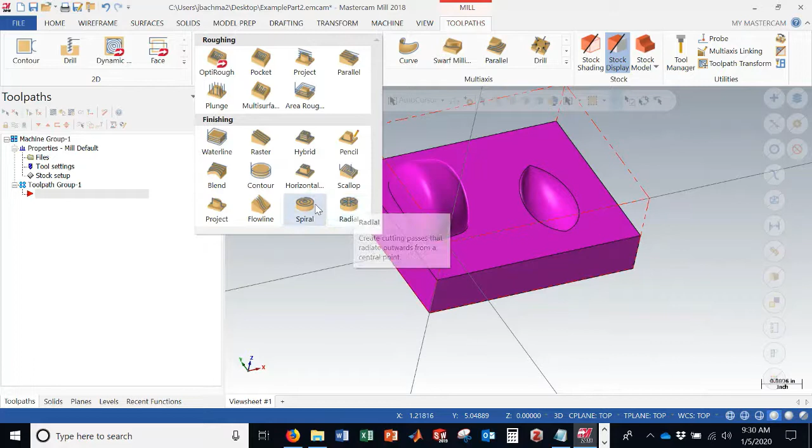Personally, in order to be able to do a bit of both, I think a good combination is usually this OptiRough and this hybrid. I've also seen times where radial or spiral could work to your advantage if you're doing something more round.

There's a lot more here than I even know about or have experience with. So if you're going to do some complicated 3D shape, I'd suggest reading up and trying a few, or contacting an expert who does CNC machining for a living.

All right, so we're going to get started trying out the OptiRough. We'll just do the optimal rough. For now, we want to tell it what we want to machine, so we go to machining geometry and tell it what we want to machine, and if we want to leave any on the wall or the floor. When I come in here, I might select this surface and do end selection, double click, and we'll want to leave 10,000ths on the walls.

That way we have something to come up and finish on. If you're going to do some 3D, you're pretty much always going to want to use a ball end mill. So we can go to the filter, none—looks like I already have the ball, less than 0.6—and that's really so you can get tangent to the surface.

So we're going to click check here. Let's just try the 1/2 inch ball end mill. Sounds reasonable. We're going to force tool change, plunge rate about 1, feed rate of about 10, feed per tooth of about 1. Maybe you could go faster than that, but using our machines, we'll leave it like that.

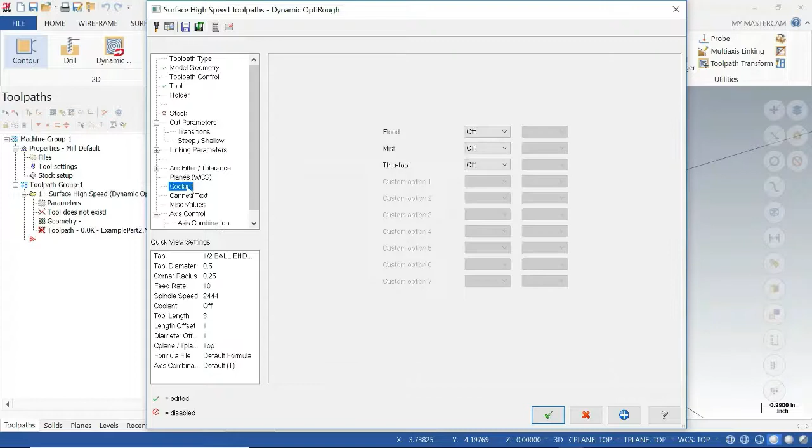But for a lot of this 3D stuff, it's going to do a lot of this automatically, and then we'd add on the coolant, right? So let's do kind of a check. When it has this little green thing, it means it's calculating. So you can see now the complexity of the tool movement.

One other thing you'll notice is it didn't really cut anything except for around it. So I'm going to save it at this point because when I verify it, there's going to be a lot of movement here, a lot of processing, so it could easily crash. I'm going to be patient with it—I don't want it to crash. I'm going to make sure I still have all my stock conditions, make sure I still have my collision checking, got my color map—that looks good.

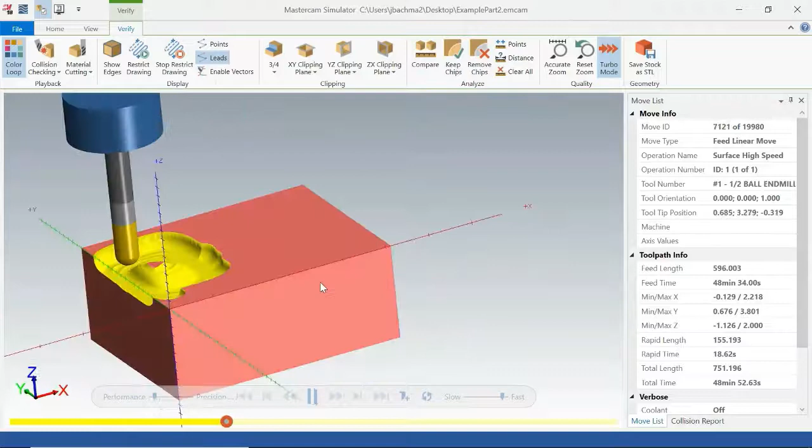So let's try this. Probably want to go a little faster in this case though, because this is already 48 minutes just to try and do this. I think that's really going to define kind of how fine these heights are here.

So you can see here we have a collision, right? Our tool is not deep enough, right? So that's one thing we're going to need to change. We'll need to come in here and make sure we get a 1-inch ball end mill with maybe a 2-inch cutting length, and then we'll regenerate the path.

Right now it's computing, right? No, it's done—it's got the toolpath. So let's do the verify.

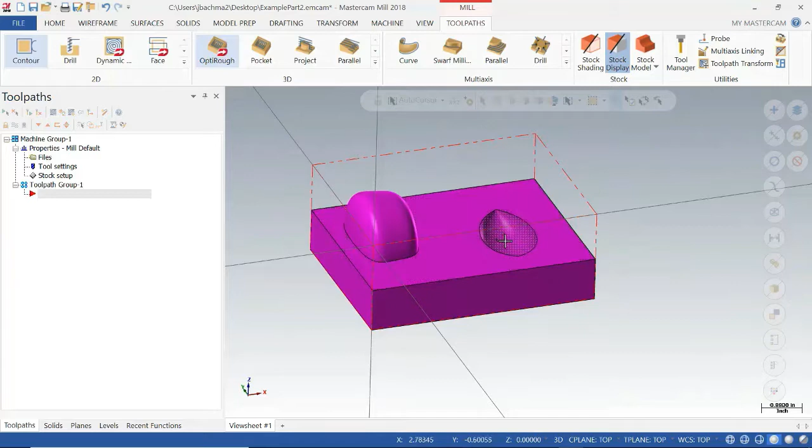So you can see it comes down here, but this is kind of not what we wanted. So what we want to do actually is get this whole entire surface. So I'm going to delete this, and I want to be able to select not what's inside of here, but make this whole thing flat. So what you can do is go to surfaces and fill the holes.

You can either select a surface or a solid face. I'll click this one. I don't want this boundary here—I want this boundary over here to be added. I select, all right, I'm going to fill that in. So I click check—that basically means it's going to fill in that face.

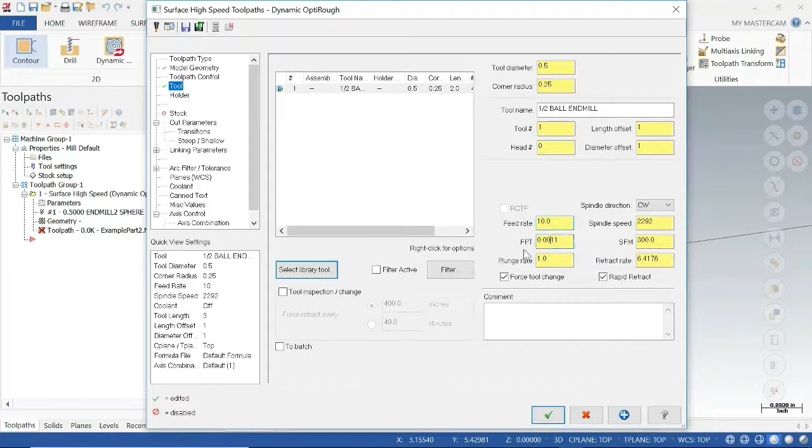So now, if I want to choose this roughing, I'm going to select things. I might select this, this, and that. I'll leave that in selection. I'm going to still use the same tool, maybe about 10. We're going to up this—we're in aluminum, so 300. Plunge rate of about 1, 10. We'll keep all of this the same. So we'll regenerate it.

So you'll see the different heights that it's working at now. Maybe we want to go a little bit finer, so let's go into these parameters and do these cut parameters. What we see here is our step down is pretty high, right? So we can take this step down, not 150% of our tool, but let's do like 10% of our tool, so that way it's about 50 thou.

So we'll regenerate the cutting tool paths. It's going to take a little while because now there's going to be a lot more, but hopefully my computer doesn't crash when it tries to calculate all these.

Oh, so now you can see that. We definitely upped the time though, right? So we do the back plot, do the info tab, we can see we already got 4 hours just to do this little tiny part, right? So hopefully your part's not this complex that you need this much, but let's, for the heck of it.

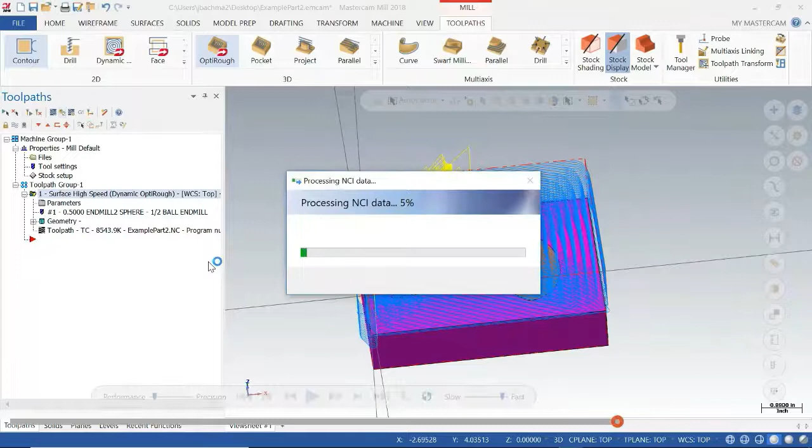All right, so let's give this a whirl.

All right, and so there's our kind of roughing, and we could even maybe decrease this for our roughing. So maybe we'll get this at 5%. Check that, regenerate it.

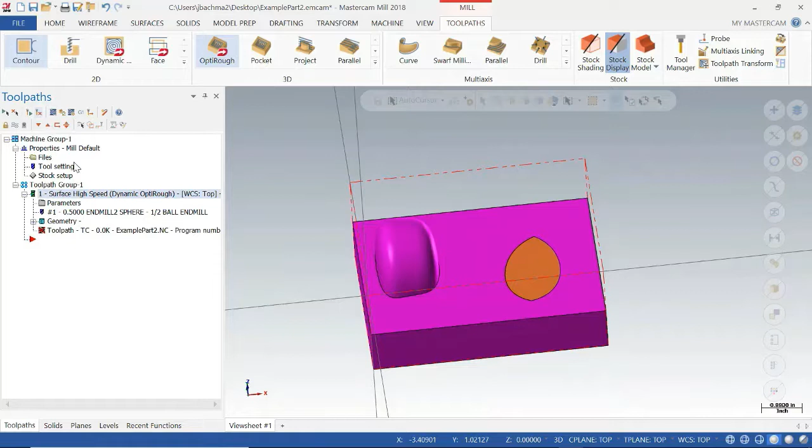Okay, and so now we'll see in our back plot, looking more at 1 hour. All right, so cut her down pretty good. And then we're going to come and do our finish pass.

So now we're going to select here. It's similar to like this OptiRough, you have this kind of hybrid. This is kind of going to step down around the outside of something. Here it's going to pick a direction, so you kind of have the same, which direction are you mostly holding constant? So we can use the hybrid, which is kind of a mix of them.

And so you'll see it'll look again. If you do happen to get something going down along the sides, we can tell it to avoid that. Again, we'll select this top surface, this face, and this surface. We probably actually wouldn't even need to really finish this one, but we'll just do it to keep it all at the same level.

Tool, use this 1/2 inch ball end mill again. It's pulling in some of the similar parameters of last time. Again, when you're doing this, you'll pay more attention to these exact values. Cut parameters, you can see it's going to go down to about 50 thousandths. And then, so let's go check.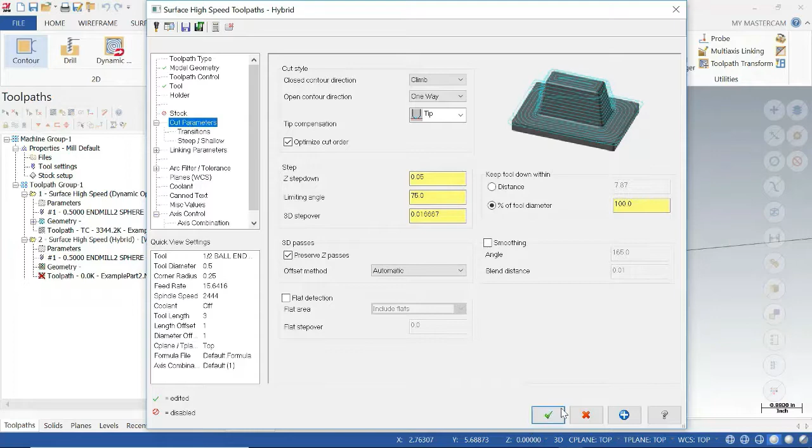Just calculating it. So yeah, so we have more of this roughing to get most of the material out, and then we can do kind of a nicer finish pass. You can see that's going to take forever, right? So if we do the back plot, so 1 hour 57 minutes. So it's going to jump around a lot here with a lot of rapids.

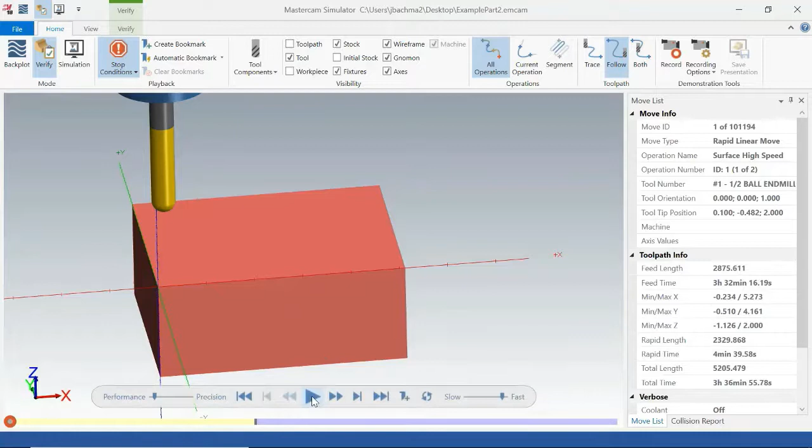So let's select them all and let's verify. Hopefully you're not making a part that's this complex. Hopefully you made a better design than this, but you could see if you've had a curved surface, this would help, and you could try some of the different techniques if you want to see ones that seem to be a little more efficient. So this is coming in, just kind of roughing the part out.

All right, so we got a tool change. Now it's kind of coming in. You can see where it's left a little bit of material, right? It's coming in, it's going to smooth off this top surface, right? So that looks pretty decent, right?

Oops, see, error message, right? So it's a good thing we saved not too long ago, because it's probably so. Good point to remember to save.

So now let's do that case, but let's actually do it so we actually want to mill down inside of here. I don't need the surface anymore, but let's pretend like it's there, because sometimes you might want to mill flat here and then mill under there. So I'll show you how to select that.

So when you go to select it now, I'm going to make sure you have it select so it's translucent, so you can see down in there, and then it's Control, double click, and it'll let you select down inside of there, top surface and this top surface, right? So we can end those selections now.

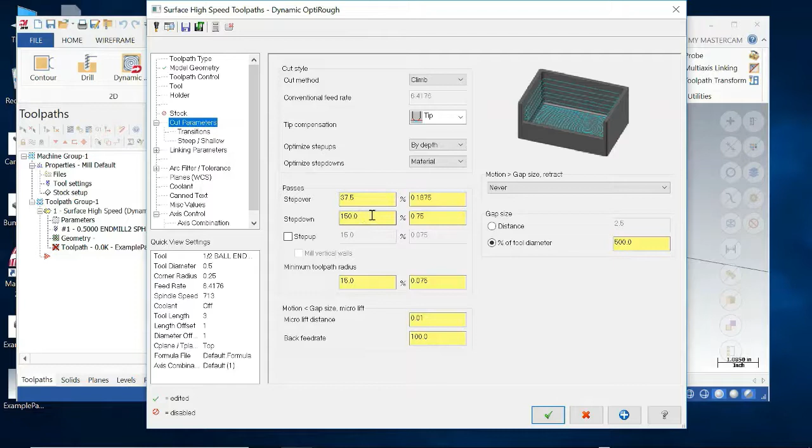Inside the cut parameters, right? We're still at 150%. So maybe we want 50%, something like that. And we would turn on the cutting fluid and stuff, right? But just to kind of show this as an example.

So now you'll see it'll come inside and it'll do this part. So let's save it, let's verify it.

So running the program at this point, let's speed it up. Right? So that took us an hour and 23 minutes to rough out this shape like that.

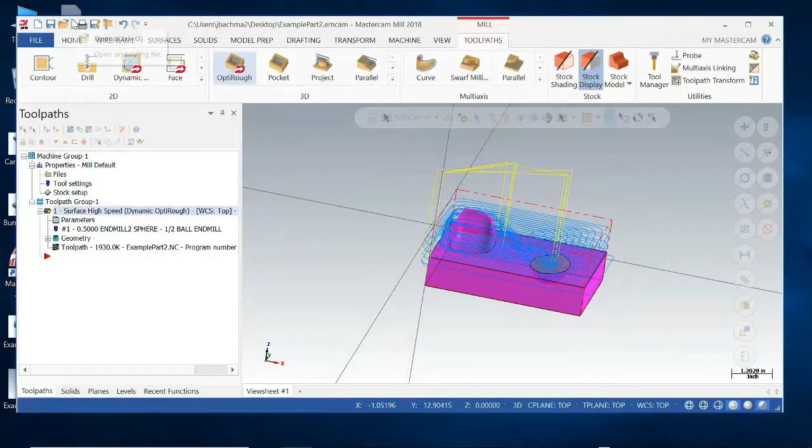Okay, so at this point, I'm going to open up a different window, go back to our first part. So now that you saw those, let's look at what we do now that we'd want to actually generate the G-code for the part.

So if you're at home, you'll save this and you'll have to bring it on campus where you have a full license, and then you can do post. So this will turn it into an NC file, so it'll have a .nc extension. We'll click check. It says not all operations have been selected, so you'll want to select them all. And it's good, it now catches that. So we say yes, we do want to post them all.

So this will be my example part NC. So I'll go to my desktop, save that there. And then it's got its little code editor.

So because we don't have the exact default posting that we'd want for Haas, we'll have to make a small modification to the code here. So you'll see you have your code number: an O and then 4 zeros for your part number, and then you're going to have your different setups. So we're going to go in inches, G0s rapid. We're going to be working in the G54 here. G43 is calling a tool offset, and then it's going to pull in the height of your tool 1. It's going to start at Z.25.

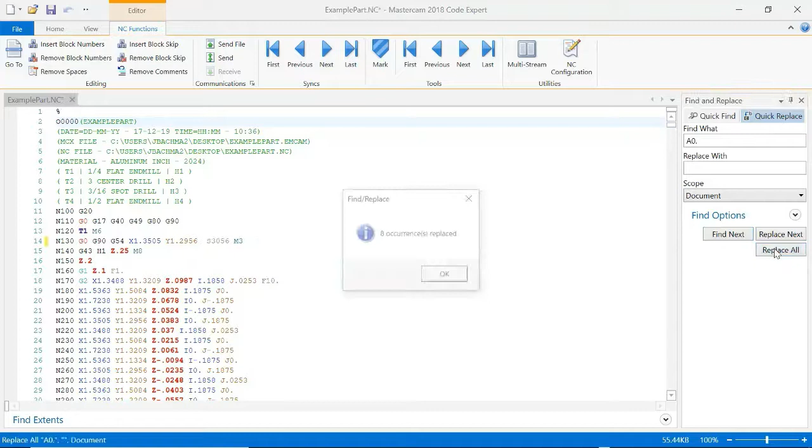And then we'll have to resave it. So at this point, you'll be able to copy this over to your USB, and then take this over to the machine. So that's bringing that over.

All the other things—sometimes I use, maybe if I want to put some letters on something, I'll use this kind of function, and you can change a lot of the dimensions, right?

And so you can click where you want them to go, and then hit check. And then if you want to, you can go to Toolpaths, and you can engrave, or usually I just contour the part.

And then I'll usually do one of these window selection methods on this part, and then the start point maybe is up here, right? So that's going to select these two. You can see some of them that we don't want, right?

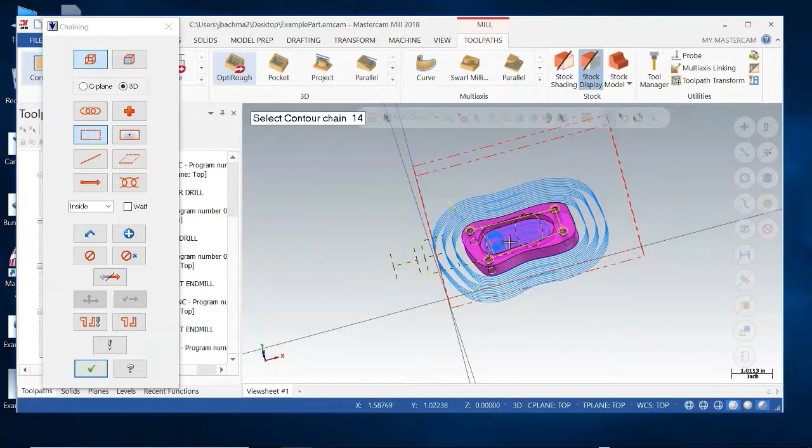So if we want to begin to try and only get one of your options, you can try and get it so you can get the bounding box to only highlight those entities. All right, so that's one easy option to try and select it.

You can also come back in and click things to unselect, but I find it's just better to find a way to select all or delete the entities you don't need, or just come and click through the ones you do.

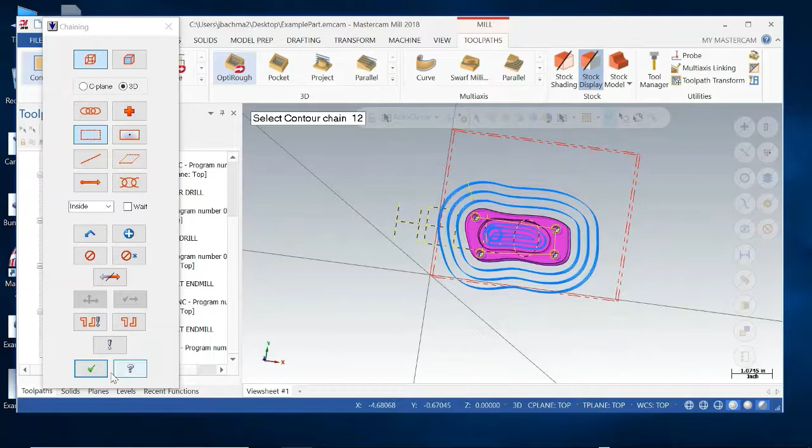So you can click through here, and the only thing you'd want to make sure of is this compensation type. Basically, you're just going to want this to be off, so that it's going right down the middle. Otherwise, it's going to be down the sides, right?

So that'd be one other thing—I didn't select anything yet. So that would be one way. You could write some letterings. You'd want to select engrave. Select this and delete it.

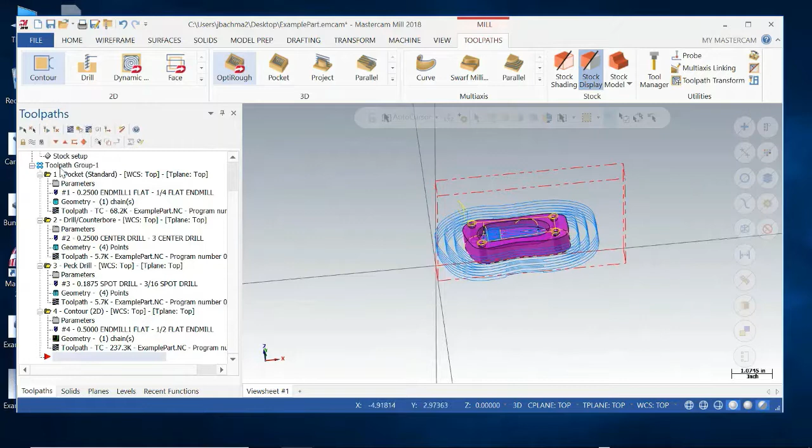One thing that accidentally happens sometimes: I'll have everything selected, right click here, and hit delete, then hit yes, and I'll accidentally delete everything I have, which is a little bit annoying. Then you try Control Z and it's not bringing back your operations. So that's one reason to save a lot.

Another thing we sometimes use is, let's come in here. I'll put in a rectangle. Select the first corner position, maybe 1,1, and the second corner maybe 2,2. So we'll do a 1 inch by 1 inch square.

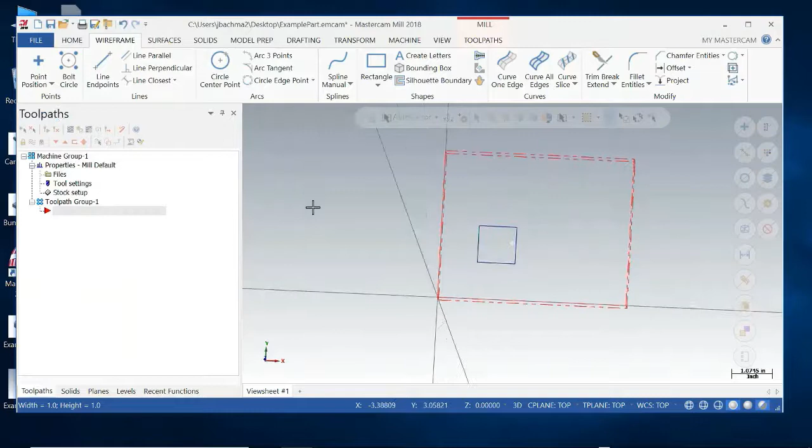Let's say I wanted to mill this toolpath out, so let's do a pocket. I'm going to select this wireframe and go along the left, so that looks good. What happens when I first come in with a 1/2 inch flat end mill, and go down 0.1, all these up.

This is going to come in and cut this material out. Let's verify that real quick. Let's hit check - you see it'll leave these corners. So what if I wanted to come in with a 1/4 inch end mill and finish that off a bit, but I didn't want to remill all the inside?

So I'll do another pocket, select this chain again. This time I'm going to choose my 1/4 inch. Check - you'll see it'll do all these cuts. Let's get rid of this one so we can see it, toggle those cutting toolpaths off. You see it's cutting all this material on the bottom that we really just want to remove - these corners a little bit.

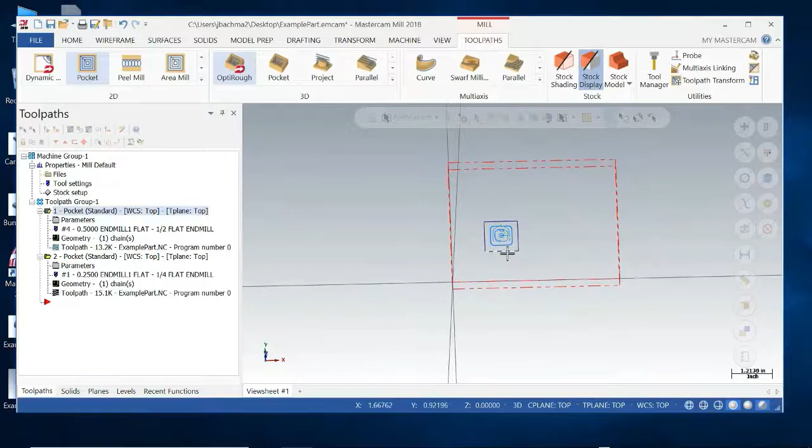So I'm going to come back into parameters, linking parameters, and make sure we're actually doing it to that depth. We'll do -0.1, absolute. On the cut parameters, pocket type, you can select remachining, and from the previous operation we'll select 0 to leave on the walls. Now check - make sure this was 0 on the walls too. 0, check, so we regenerate all the dirty operations.

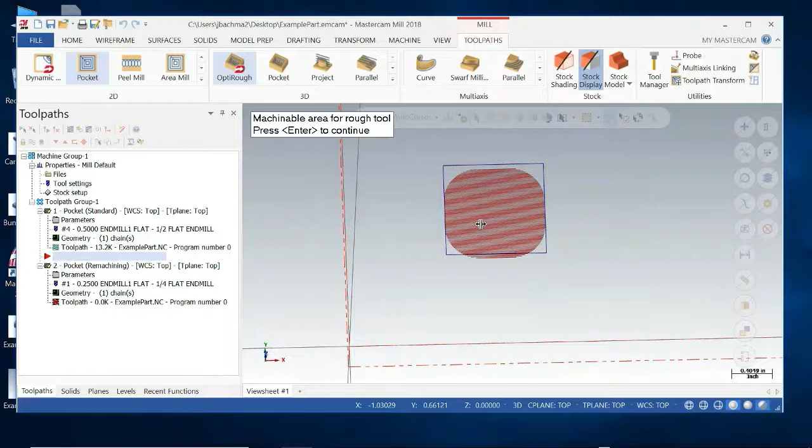Oh, the ball end mill - that's not a ball. So it comes in then and does that part. We'll slow it down a bit so we can see this last part. This one's going to come in, it's just going to peck away at these corners basically. That way it doesn't have to machine the whole bottom, just the parts that are left.

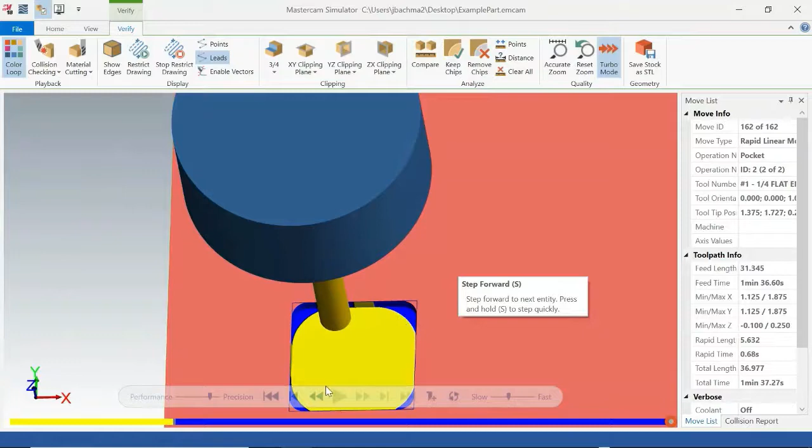Do it fast. Remember, another thing I like is to have the color loop on, so now I can see what comes to this, and what's going to get cut away with the blue. That helped me get a little bit sharper radius in the corner. Right click and hit fit, get this here.

So yeah, that's a little bit about the different things you can do in Mastercam to program. After watching this, hopefully you'll be ready for an in-class workshop where we can begin to actually work on some of this stuff and play around with the tool. I'd definitely encourage you to talk with the machinists on campus or students who use the tools more than you do, to learn more, because this is just a really quick run through to get you started thinking about some of the different things you can do. All right, good luck and be careful.